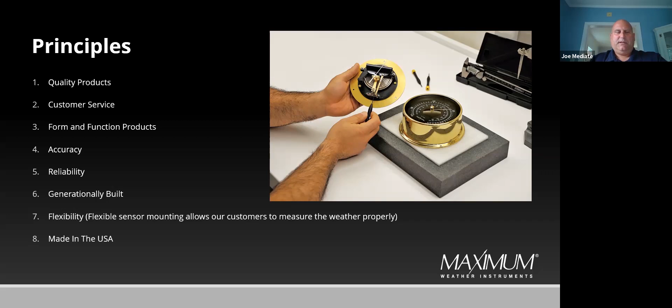So with that, we want to go to our product line and take a look at our product categories. As we talked about before, Maximum was founded on the wind instrument, and product categories gradually expanded from there to now include all weather conditions, including temperature, which are thermometers, pressure, which are barometers, humidity, hygrometers, rainfall, and also time and tide clocks. And coming soon, we have a new Wi-Fi product offering that we're very excited about.

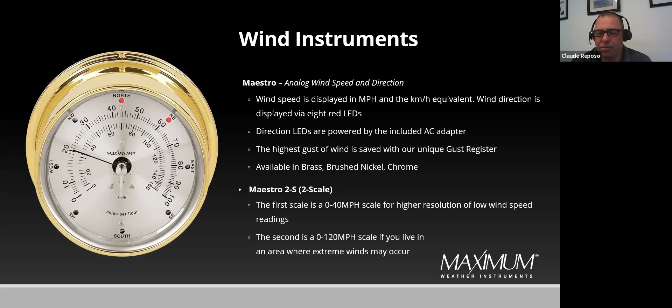Joe, I don't think I have the ability to flip to the next slide.

On the Vigilant, the 0 to 100 scale, 0 to 160 scale is the standard. At times, customers ask about expanded scales on this particular instrument, and we can add a scale doubling so the instrument can record winds of up to 200 miles per hour. It uses the same wind speed sensor as our Maestro, and the number 41 sensor is virtually indestructible, one of the most robust external sensors available, able to withstand winds of up to 200 miles per hour, as long as the installation itself can hold up.

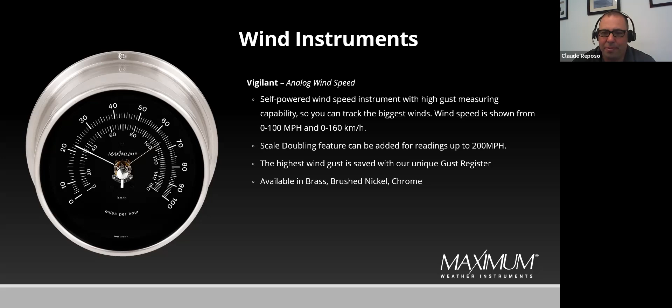Moving on to the temperature instruments, we offer...

The instrument pictured there is the Criterion. It's an outside temperature instrument with an accuracy of plus or minus 1 degree. The Criterion measures degrees in Fahrenheit, and it also has the Celsius scale right below it.

It gives you the ability of multiple locations. We can install a switch to be able to switch different temperature points in your home. Some people choose to record water temperature if they live near a lake or a body of water. It also gives you the ability to record air temperature in multiple locations, whether inside the house, outside the house, or in a different place altogether.

The Criterion is very closely related to the Minimax. Our Minimax thermometer is basically the same circuitry for temperature, same accuracy, plus or minus 1 degree, but it gives you the ability to record high and low temperatures.

It has 2 switches, a reset and a high and low, so you can jump from low and high temperatures. Because most of the time when you have a thermometer, you're not there looking at the extremes, so it's nice to have the ability to record.

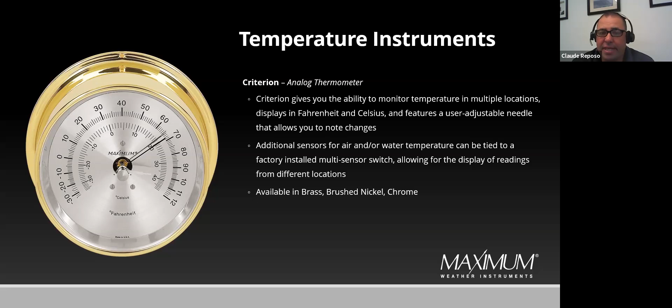Back in 1985, Maximum started offering digital instruments as well. There was a request by many, and back in the mid 80s, really began the digitalization of electronics, and we developed the Mystic and also the Merlin and Rainwatch, for that matter, to record wind speed, wind direction, temperature, rain, and barometric pressure.

So the Mystic is a dual function instrument. It records outside temperature and barometric pressure. Being a weather processor, it has circuitry with a microprocessor, which gives us a lot of flexibility with that particular instrument.

It gives you the ability to record not only the current temperature, high temperature, low temperature, but it can also calculate the wind chill when it's tied into one of our wind speed sensors.

Being a multifunctional processor, we added the barometer in there to give you a very accurate barometer, plus or minus 0.08 of an inch in accuracy. So it gives you the full functionality of a barometer.

Along with the current barometric pressure, it gives you the high barometric pressure, low, and the rate of change, which I'm sure all of you are well aware is the best way to see oncoming storms and what the weather will be doing in the short term.

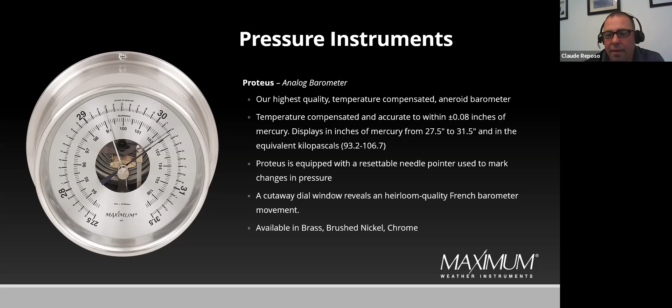The Predictor is basically the Proteus's little brother. Again, very accurate, not quite as accurate as the Proteus. The stated accuracy is plus or minus 0.16.

In reality, when we manufacture these, we hold it to a standard of plus or minus 1/10 of an inch. If the calibration ever falls, we do all of our calibration and can service all the instruments here. So every single barometer that we build, whether it's a Proteus, Predictor, or even a Mystic, gets 100% inspection.

When we verify the calibration, we calibrate every 5/10 of an inch. So from 27.5 through 28 inches, all the way through 31.5 inches of mercury, we verify that it's within calibration at all those points, making it very, very reliable, because aneroid barometers are by nature, not much can go wrong with them if they're built well.

We give every mechanism a thorough visual inspection and then run it in our barometric pressure chamber. So we're very confident with every barometer and every instrument that we sell, that it's going to stand up to any environment that you put onto it.

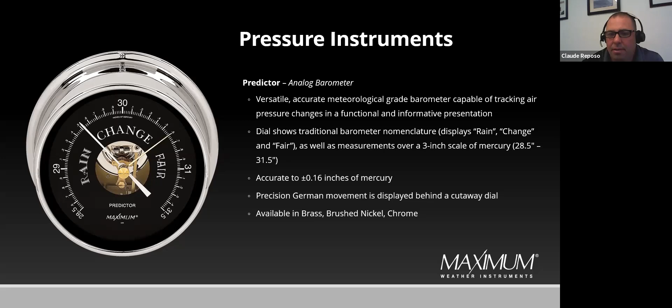And just one thing about barometers, it's probably one of our most popular sale items. One of the reasons is because you don't need any power. You put it in your house and it just works. There's no setup. So that's one of the great things about barometers.

Humidity may be the most difficult sensor that we have to measure accurately. It took us a long time to find a sensor that we were comfortable with that would accurately measure outdoor humidity and be reliable. Those two things aren't always synonymous with each other when dealing with humidity. There's so many different factors that go into measuring humidity.

Once we found this sensor that we're using, we developed the Stratus, which some of you that are Maximum aficionados may remember as the Sensor, which had a very similar look to the Stratus, but used a different sensor. And once we found the sensor and developed the Stratus, it opened up a whole new set of doors for us.

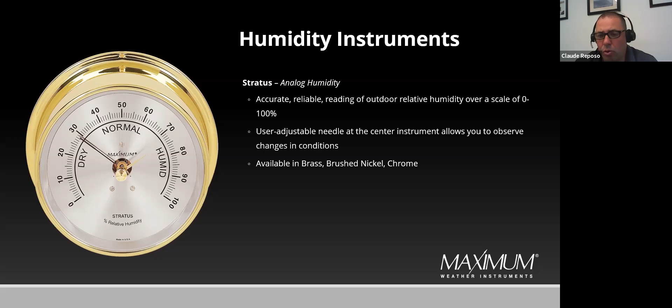Our other analog instrument is a Comfort Minder. Our Comfort Minder is also analog, completely self-powered, so there are no wires, no power. It uses mechanical mechanisms to record the humidity and temperature indoors.

Sometimes we get asked, can these be used outdoors? And the answer is, of course. Assuming that you do shelter them some, they can certainly be used outdoors as well. Now, when you're dealing with outdoors, you also have the issue of contaminants in the air affecting the beautiful finish of our instruments. But that aside, the Comfort Minder is a very flexible instrument because it can be used anywhere.

So we have people that use them in their wine cellars or their greenhouses or piano room or right in their kitchen. So it's a great instrument because it is so flexible with installation and so easy to use.

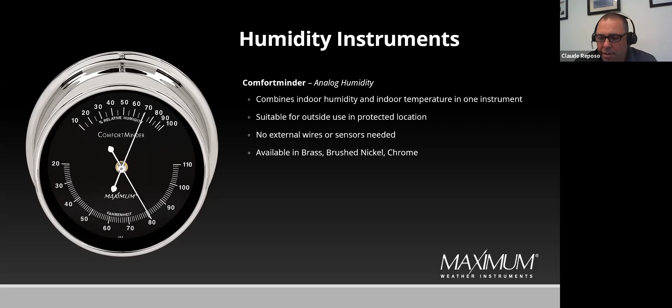Our rainfall instruments, again, we developed the RainWatch back in the mid 80s to go with our Merlin and our Mystic. RainWatch uses a NWS style rain collector, which is a tipping bucket rain collector. Very accurate. The RainWatch can measure from 1/100th of an inch to 99.99 inches of rain.

It's easily user selectable to change into centimeters or millimeters using a switch in the back. Like our Merlin and Mystic, there's a 10-year backup on the RainWatch data. So if you were to have to power down or lose power during a storm, it retains that last memory.

The RainWatch also has the ability to, if you were to miss some rainfall count, you can easily add any total using the switches on the bottom. So with a few clicks of the switch, if you miss a couple of inches of rain, you can add that total to the RainWatch and keep on going with your historical data.

I have one of these in my home, and it's one of my favorites for my family. They love to know how much it rained, and they love to know how much it's rained through the year. So I keep mine on a monthly basis, and then I reset my total on a yearly basis, and it gets a lot of usage at my home based on everybody's curiosity, because you can see it rain and the intensity of the rain at times, and it's hard to really know how much actually fell in that particular location unless you're recording it with some device.

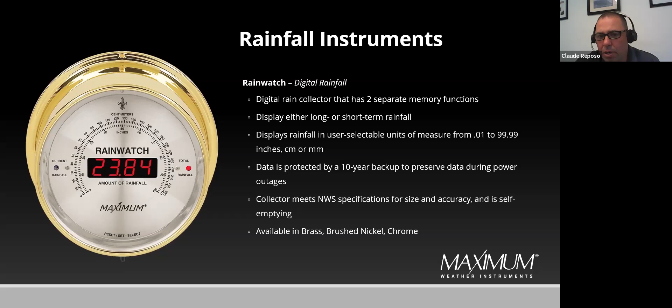And the RainWatch is a great way to record rain.

We have our time and tide instruments. Again, analog, they're quartz movements. They are run by a single AA battery, which will keep the clock running for over a year. We always recommend that customers change their batteries on a yearly basis, maybe during daylight savings, just as good practice. Our tide clock is one of our most popular instruments.

It's an East Coast tide clock, so the Atlantic tides average 12 hours and 25 minutes, and that's what that clock is based on. Basically, the full revolution takes 12 hours and 25 minutes. The Harbormaster is available in silver and black dial.

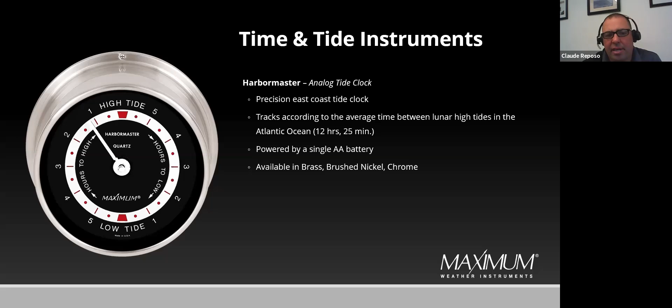The best time to set a tide clock is at high tide or low tide, because you get less error that way. 12 hours and 25 minutes is an average, and over a 28-day period that usually proves to be true. So as not to introduce more errors, it's always best to set any tide clock right at a high tide or low tide.

Our Meridian clock is a time clock, and it's very traditional, very accurate, plus or minus a minute per year. Again, like the Harbormaster, we recommend replacing the battery once a year. It's just a good old-fashioned clock that just keeps on ticking. It is very reliable and a beautiful clock.

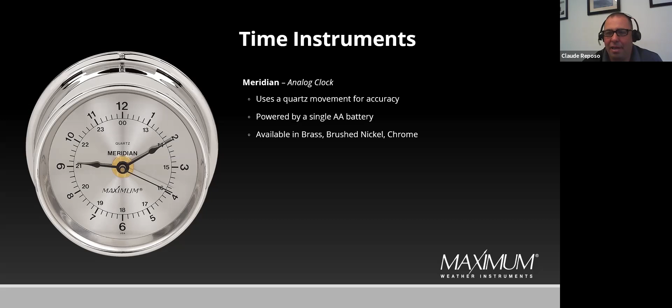It's timeless. It's the timeless look that, when you look at it, you get a nostalgic feeling. Again, another one of my favorites, only because I'm a big fan of looking at a clock to get the time, not necessarily the phone, and I don't wear a watch. So I have clocks all over, and really appreciate clocks. Everybody has their little hobbies and idiosyncrasies, and mine is clocks. I just love clocks.

Back when we wanted to combine time and tide, we had a time and tide clock back in the early 80s, the mechanical time and tide. Due to constraints, when we always try to make all our instruments match with each other, it's important that we have customers who purchase an instrument 20 years ago and then 20 years later decide they want to add something to it. Unfortunately, making a mechanical time and tide would have meant going to dome glass, because the clearances meant we just couldn't get anything to fit.

In order to keep the look the same, we decided to do a digital time and tide clock. So that's where the Chronos came into development. Again, a very accurate time clock with a digital readout, so really easy to read whether it's day or night. Extremely accurate—like the Meridian, plus or minus 1 minute per year, usually even better than that. And the tide runs off the clock. Pretty easy to set, has backup memory, so if you lose power it comes back on and you don't have to set anything. It automatically adjusts for daylight savings time and back. So basically you set it up, put it on your wall, and it works indefinitely.

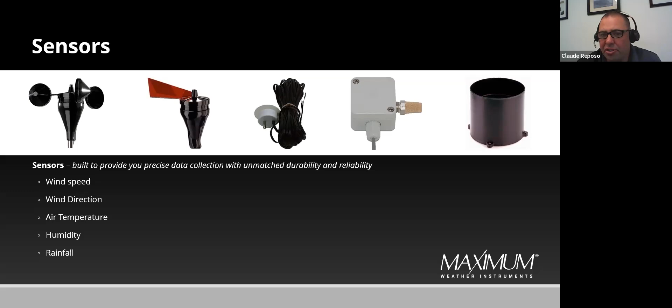But we offer the sensors for all of our instruments, replacement sensors. We have customers that use them for their own logging ability and to create their own data collection. And so, again, whatever is needed, we're always there to help our customers with whatever they need, whatever questions need to be answered.

And just to talk a little bit about our Wi-Fi that we've mentioned a couple of times, we've had many products in the past, and we always try to innovate. We're always trying to make things easier for our customers to install and bring technology whenever we can.

There are many products out there, computer products, that have wireless ability and Wi-Fi ability and internet connectivity, but not many have the same look that we do. Our customers want the look that we can provide, and they're continuously asking for a little more innovation.

And we had the ability to create this Wi-Fi based system to engineer it basically from the ground up. We had a wireless instrument that was based on a 900 megahertz radio. Unfortunately, the transceiver became obsolete, and we started thinking about how can we make it better based on feedback that we've had from our customers. And that's where the birth of the Wi-Fi system came.

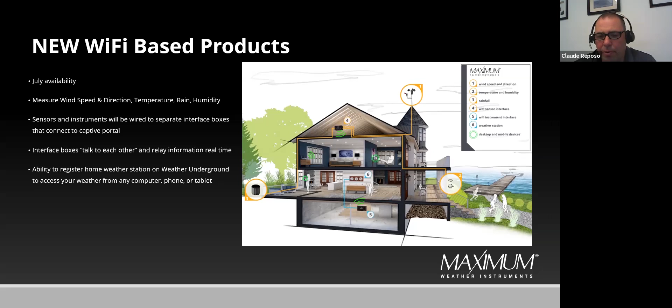So that's one of the things that we really can help with as far as installation. If a customer calls, we get calls all the time, basically asking us if they take pictures, can you tell us exactly what the best place would be? So that's always something that we are ready and available to do, is help with explaining where the most accurate readings will come from installation.

So with that, we'll just go to the summary, just to summarize what we talked about over the past 40 minutes. Maximum is just totally committed to create the highest quality, most accurate and reliable products available, and provide the best customer service in the business. It's just something that we've always strived to do. And one of our main goals is to have our instruments be enjoyed by families and also be functional and a beautiful part of a home, in addition to a home.

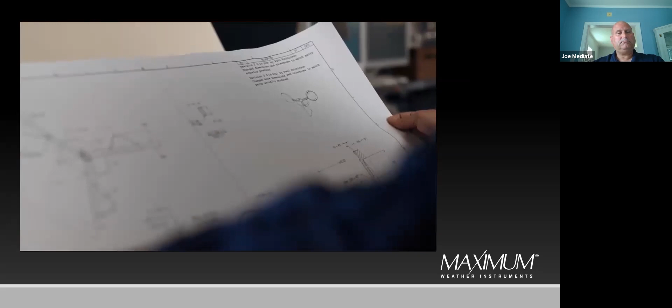Maximum was founded in 1968 by a gentleman considered far from ordinary. He had a passion for analog instrumentation. Everything we create is designed with form and function in mind.

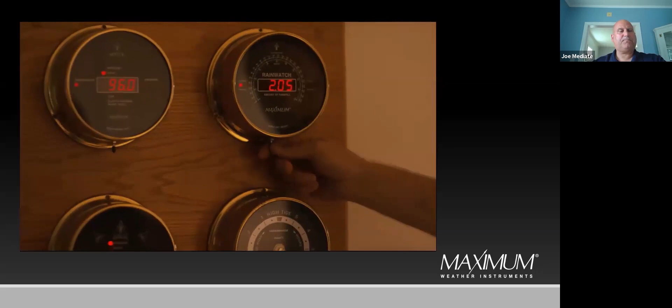The weather instruments are handcrafted here in New Bedford, Massachusetts by people who have been doing it for many years. We build a very reliable, accurate instrument, and we stand behind it like no other company. One of the things we hear from our customers is that the instruments give them a story to tell to their friends and family. It's a piece of artwork with function.

We love to hear our story passed down through generations. A lot of people today are buying them because they were either in their parents' home or their grandparents' home, and they look back at them now as something nostalgic that they don't see that often. Our commitment is to keep making products that allow you to live a life that's far from ordinary.